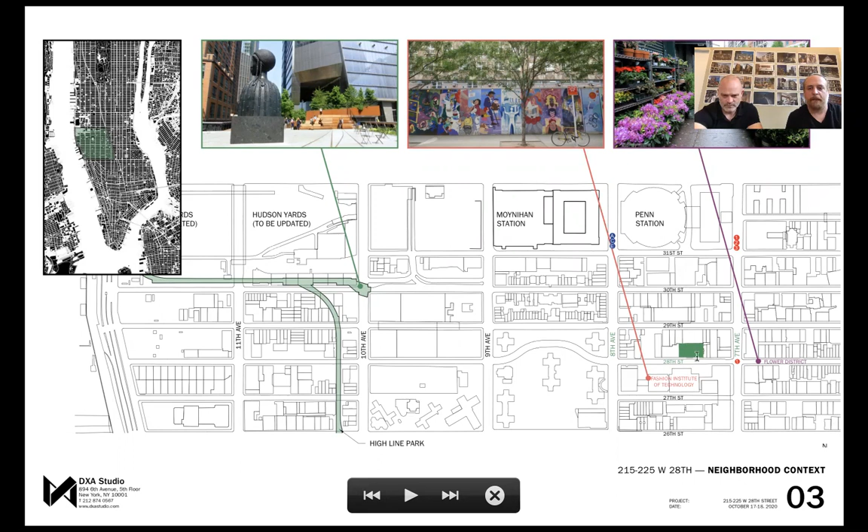So just to help orient you to the site of the project, our project is located right here on 28th Street between 7th and 8th Avenue. It's a really interesting block that's undergoing a lot of different types of transformation. And it's in an area of the city with a lot of different things going on. There's Penn Station to the north, there's the Flower District to the east, FIT is located just south of the site. And then, of course, there's all the new development that's happening with Hudson Yards and the High Line over to the west. And it's just really interesting to see this neighborhood take on a complete transformation in the last few years.

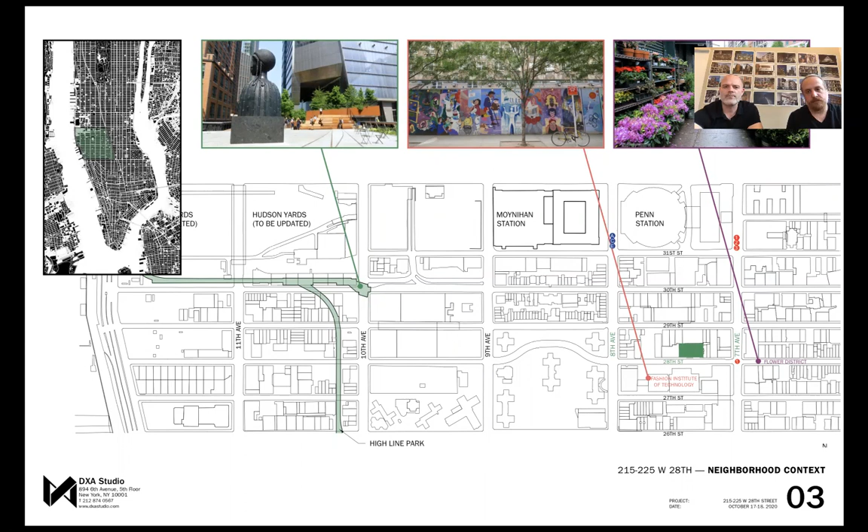Our block in particular is really going to be completely different in about the span of the next year or two. Our site is located in the sort of left center. And then there's all these three other new developments that are occurring on the block. And so this entire block is really changing in terms of its scale and texture for the city, and we'll walk you through how our particular project is being developed here.

So just to give you some of the basics, there's really two buildings on this development site, and that has to do with the zoning district. The zoning district is an M1-6D, and it's a very unique manufacturing zoning district in New York City that actually allows you to do residential construction. Most manufacturing districts do not allow that. So this is kind of a spot case where we can do residential.

And the project consists of a condo building, which is on the right-hand side of the image, which is the lighter building, and then a rental building on the left. And the total square footage of the project is around 300,000 square feet. There's 200 units of residential, and there's a portion of those residential units located in the rental tower on the left that are actually affordable units that allowed us to build a little bit taller and to do some additional floor area, which is a great benefit for the project.

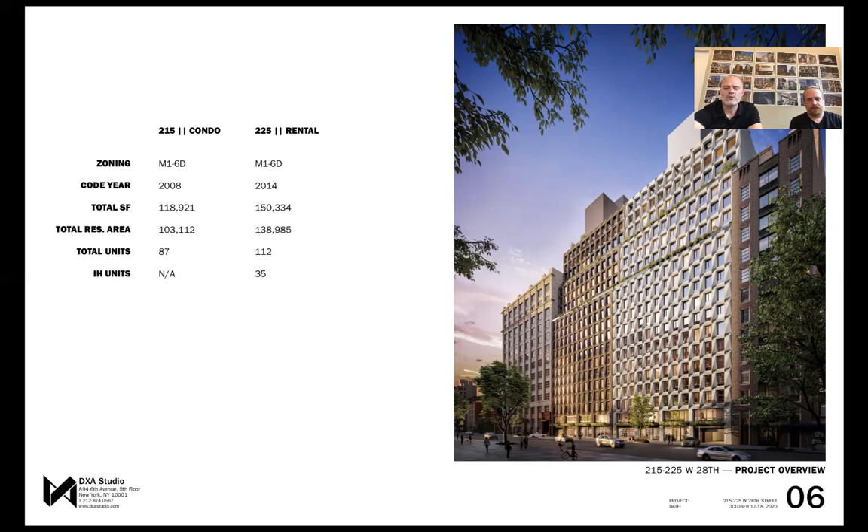And this became a lot of study in how this would affect the residential units, how it would affect kind of repetition as we move up through the building, and so forth. So this is where we started off in a number of different studies like this.

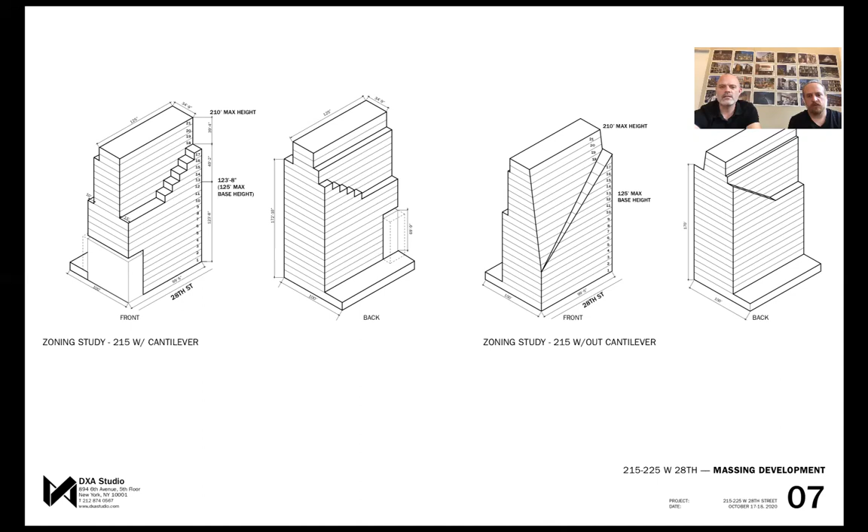And then one day, as we were discussing the complexities of building a deep foundation on the western side of the site, the owner said, don't worry about that. And then 2 days later, we had a meeting where they explained that they had purchased these sites to the west, and we essentially doubled the size of the project. So at that point, they decided that in addition to a condo building on the right, that we would also do the rental building. But there were a lot of dynamics at play, especially with those existing holdout buildings and how we would cantilever over or distribute the area between the condo building and the rental building in different configurations.

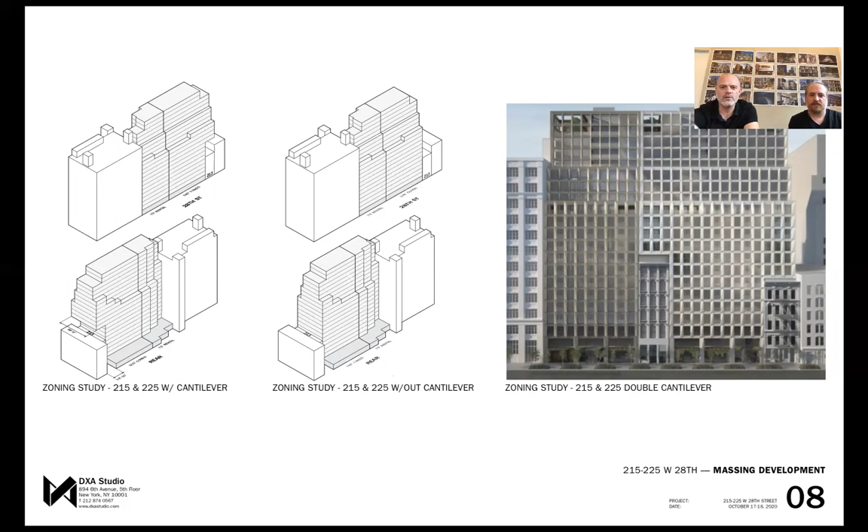And this became a series of studies that we did over several months to kind of maximize the project for the owner. And then ultimately what we did is we just kind of arrived back at a more simple solution, which was simply equally dividing the buildings, and also deals were worked out with those tenant holdouts. So we were able to do full-on buildings with complete facades on either side, which turned out to work really well.

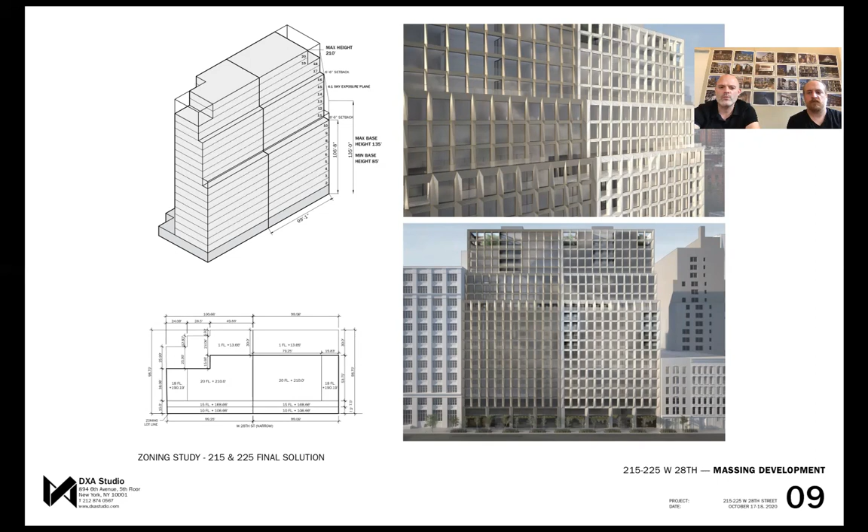And then with this kind of sky exposure plane, which is a zoning requirement that allows more light into the center of the street, we get a series of setbacks, so we really get kind of a tripartite division to the building: base, middle, and top. And Jordan will go into more detail about how the facade kind of reacted to that condition. And on the lower left, you can see just a basic floor plan of how the building is configured with the lots through, but the left-hand lot kind of indentation in the backyard, which affected the massing in the rear of the building.

So right off the bat with the facade, the project, as Wayne mentioned, grew from about 100 linear feet of frontage to 200, with a height just over 200. So we had kind of a large square facade surface that we were dealing with. And we were concerned about the scale of the building from the beginning in those proportions. The square is kind of inherently static. And we wanted to kind of balance things and make sure that the scale wasn't overwhelming.

Because like with most development projects in the city, we're charged with getting every bit of floor area ratio, the FAR, possible. So maximizing the form in a lot of ways is derivative of the zoning requirements that Wayne spoke of. So right off the bat, we were thinking about how do you scale this down? How do you kind of break up the rigidity of the building facade across that 200 linear feet? And so we thought about asymmetrical elements, as you see in the sketch on the left there.

But as we started to explore what building materials we were going to use and what construction technology, we really focused in on precast mega panel construction. That is essentially building about 24 to 25 feet of width, a full story at a time, with the windows embedded and constructed and waterproofed and ready to go, and delivered to the site that way so they could be hoisted up and put in place. And so using that technology really dictated a simpler and more repetitive geometry with kind of a donut construction, meaning kind of circular around the punched openings.

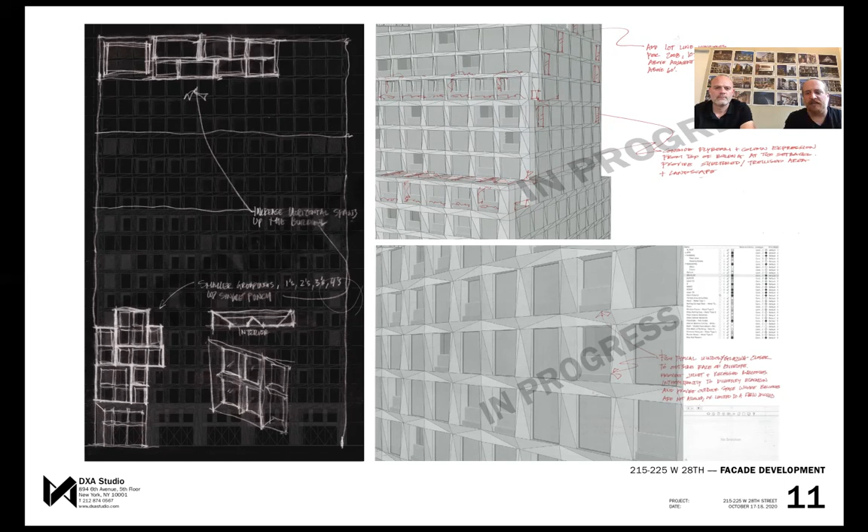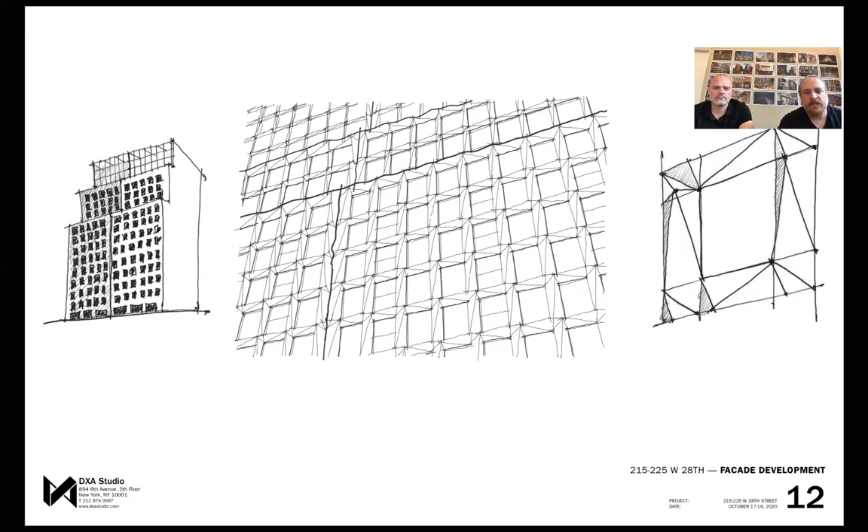And so then we began to focus on kind of a simpler geometry and looked to other design devices by which to kind of break down the scale to a certain degree. So we have the rigidity of this grid, but then there's a lot of depth to the faceting that we settled on. And then we also looked at contrast, essentially taking the condo and rental buildings and expressing them as two independent buildings and using contrasting colors or materials. And so quickly we settled on using the same material, but kind of a different nature, which we'll get into.

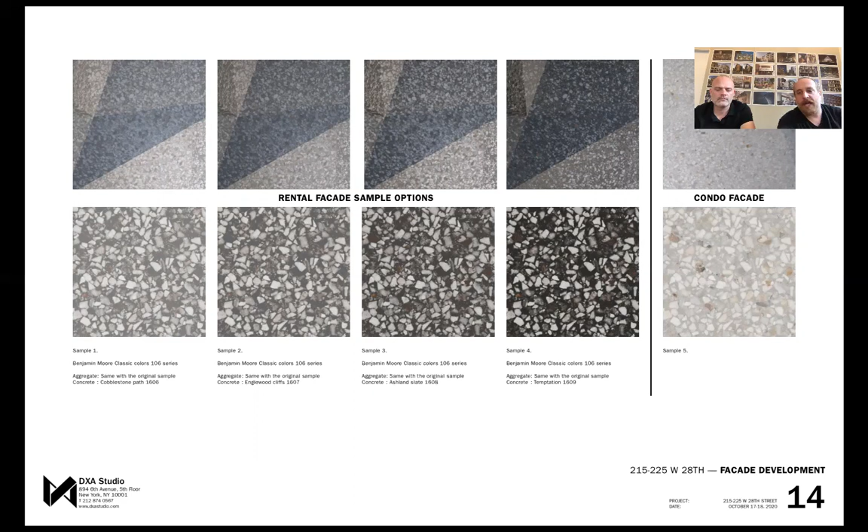So those colors and the contrast really come from the nature of the material, which we are treating like a terrazzo, casting this in concrete and then basically peeling away the cementitious outer coating to reveal the aggregate. And so this is where we landed with all of those tests and mock-ups of the different cast concrete system.

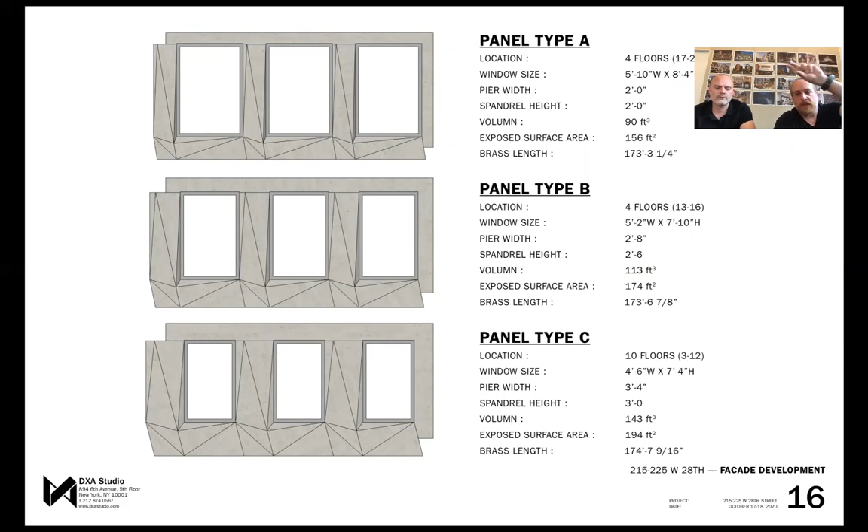And we worked with BPDL up in Canada, and we basically tried to dial it back and systematize the fewest number of panels necessary to get this kind of graded aperture of building as you work your way up the building. So these are the primary panel types, and then there's a few different ones for the cap of the building and the sides of the building.

So we systematized it, and we were able to, using the precast concrete, get a lot of depth. And that's not something you always are able to achieve in a facade. And why that was important to us is this site is extraordinary in that we're located right across from FIT, and FIT has, I think, about 6-story buildings. And we have an unobstructed view of the sky to the south for the top 15 stories of the building.

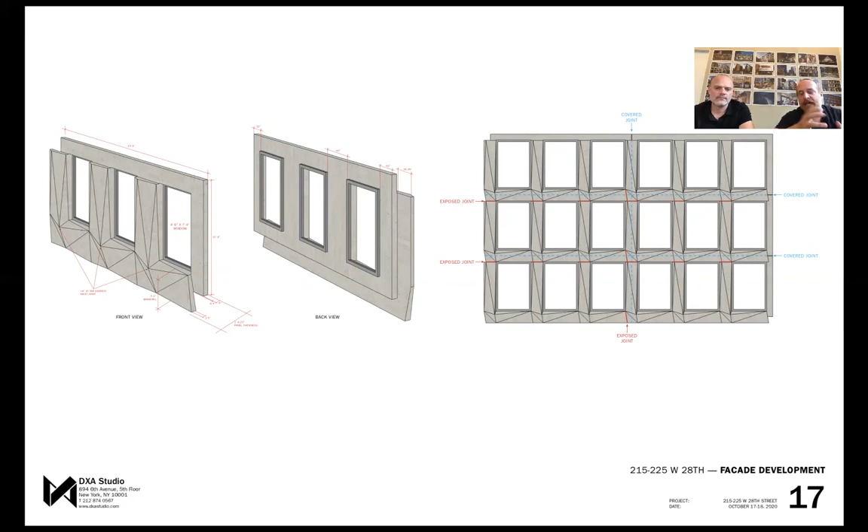So the relationship to kind of the sun passing by this facade over the course of the day was really important to us. And this faceted facade really brings the facade to life over the course of the day, changing dramatically from minute to minute as the sun illuminates portions of the panel and casts others into shadow. So we wanted to kind of accentuate that feature by

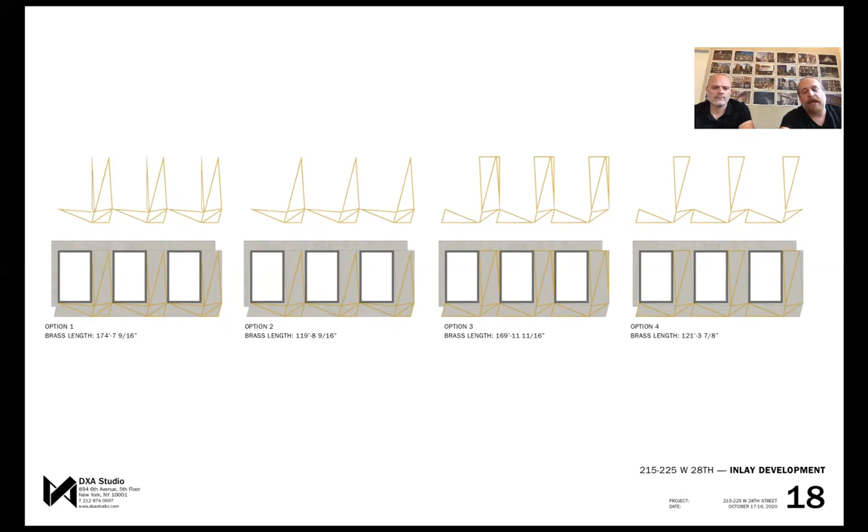We quickly abandoned this idea of an additive piece or a piece that's cast in concrete, and replaced it with this approach where we're able to actually cast a reveal where the facets meet one another, and then use automotive paint inside that channel. And that becomes a reflective surface, so that as the sun's moving across the facade and illuminating different facets, you're getting highlights in some of these channels. And so it's like another layer of kind of life and vitality to the facade. And we did that for the condo building.

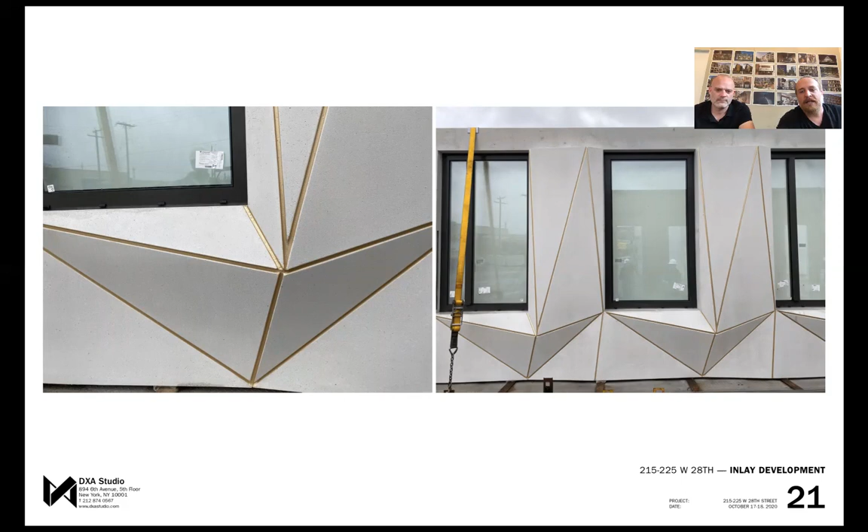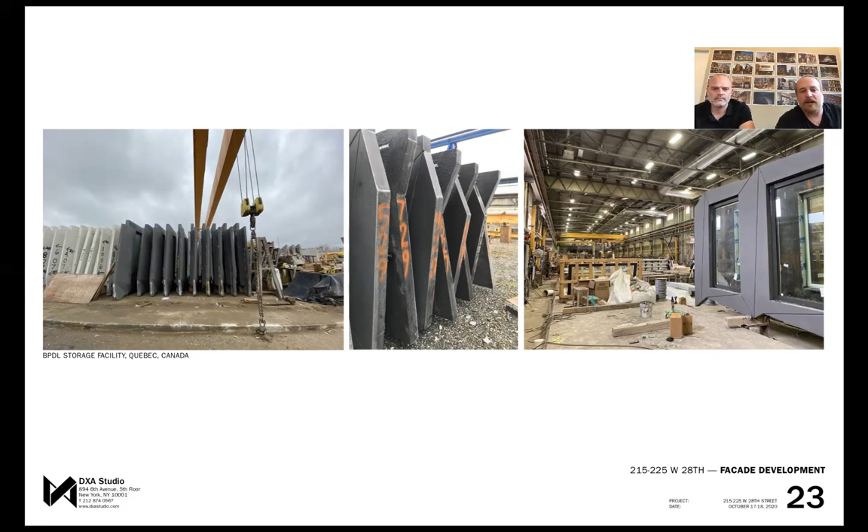And this is after a few days of them making the facade elements for both the condo and the rental building, and storing that inventory out in their yard. So here's some shots now going to the actual site where we're beginning to put these panels up. And the images that you're seeing here are actually from the rental side and some piers that exist in the lower portion of the building.

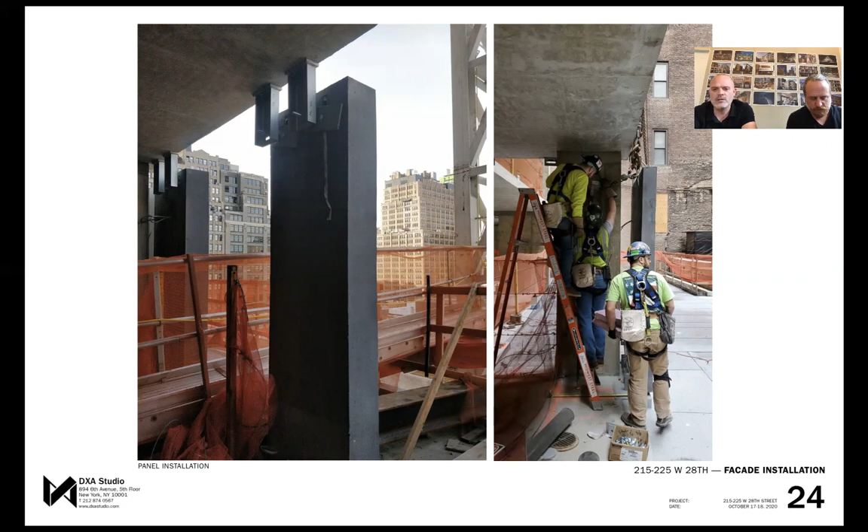So the way that these work is there's a tower crane on site. They're delivered in the trucks. They're picked up off the trucks, and then they're lifted into place, and they're attached to the facade with these kind of metal angle clips. And there's slotted connections, and there's also steel shims that are used to get the panels exactly in the right place. This is actually a shot from the 19th floor, as you can see the panel's labeled 1911 there.

And these panels range anywhere from, in this project, about 17,000 pounds up to 25,000 pounds, or even a little bit more than that. So it's a very heavy facade, and the structure has to be designed in a way that can accommodate it. But one of the real advantages, in addition to all the aesthetic things that we mentioned, is that the facade can be constructed rapidly.

In the span of just a few weeks, you can get the panels to be completely in place. And then from there, the insulation and the interior stud work and everything follows behind that in a very orderly sequence. And it's a really great process to this type of facade.

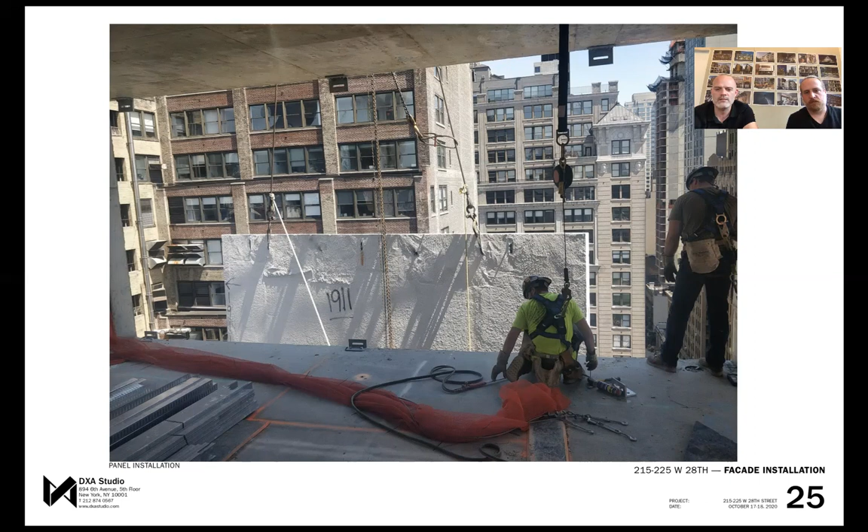This is a shot from the rental side on the 11th floor, hoisting another panel into place. And we like this shot because it actually was something we didn't try to do with the facade. We didn't really start by looking at FIT and their geometric pattern that they had. But later on, we realized that, oh yeah, there's a relationship there that's almost an inherent thing, ours being a very different approach. But it was an interesting connection that ended up happening. That happens on projects a lot of the time, that there's an unintended direction that evolves, whether it's subconsciously or just a total coincidence. We see it happen on many projects, and this is definitely one of them.

So then here's a shot from up on the 19th floor. So the 19th and 20th floor, we have these fly beams. So it's actually an exterior space that is protected by the precast facade, and this works out really well because at that height there's a lot of wind and the elements are a little bit more intense, and also just that feeling of being exposed at that height is nerve-wracking for a residential experience. So we wanted to provide a sense of safety and protection up there, but it creates some really interesting spaces in the project, these double height views, and also the views out to the city skyline.

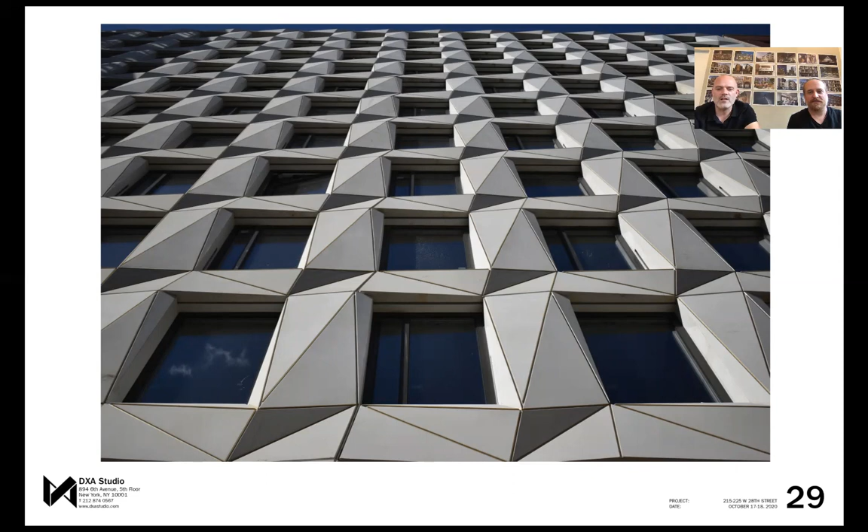So then ultimately, these are shots of the facade completed, and all of those effects that Jordan was mentioning about the shadow and the articulation of the inlay line work really comes together well. And we're just very excited about the overall quality of the precast facade and this contribution to the streetscape. Here's also a view of the rental building. In this case, we don't have the inlay, so it almost has this wave-like quality, which is really quite beautiful.

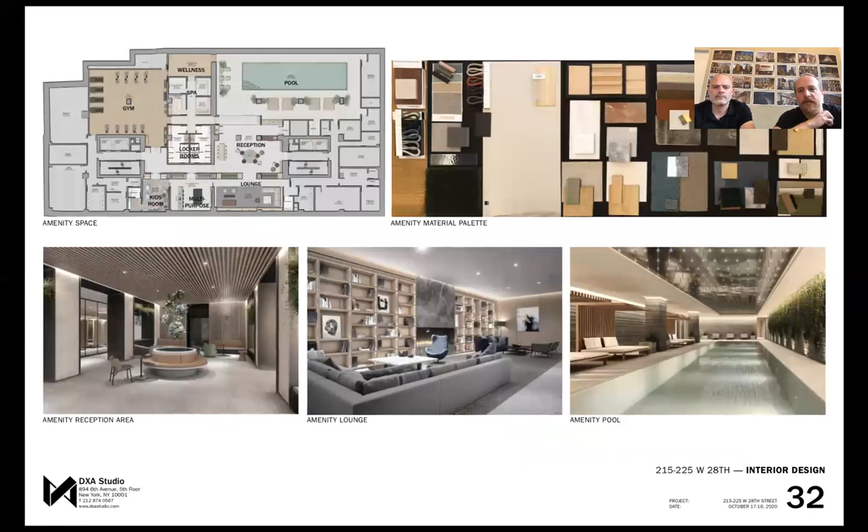So the interiors, like many of our projects, we wanted there to be a very strong relationship between the envelope and what happens on the interior. So there's a coherence to the overall design vision. And so in this case, we focused on health and well-being and thinking about this building as a respite from the crazy city life that we all live in New York City. And with that comes a really incredible amount of amenity space. I think we have over 30,000 square feet of amenity space available to both the condo and rental buildings.

And a big portion of that is subterranean. We'll get into this really amazing parking system that we have for all the residents in a minute, but beneath all of that is this incredible amenity floor. And initially we tried to really bring these shoots of light down to activate the space, but that proved to be infeasible. And so we focused on really natural materials, stone and woods, which also gets repeated up in the units.

But we also spent a lot of time thinking about the quality of lighting. So there's a lot of indirect light and materials selected for their luminous qualities. So we wanted it to be a bright, energized space, and it's really again focused on health and well-being with a big spa, a swimming pool, a gym, and then a community lounge area and multi-purpose room and kids' playrooms. It's got a little bit of everything. I think there's even a pet spa in there, which is not uncommon in buildings in the city these days.

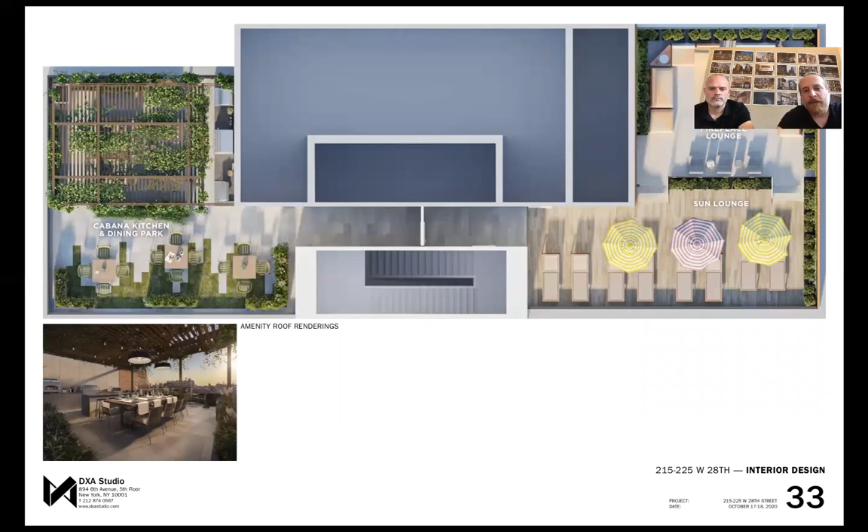And then the northeastern corner has a really incredible view of the Empire State Building, just a few blocks away. So that's kind of a lounge area with a big fire pit. So this is going to be a fantastic amenity for the people living in the building.

And then the material selections and palette, we played a little bit on the contrast of the hue and materiality on the facades, and brought that into the master bath. And then the strong geometry is also brought in the form of chevron patterns, or this custom carpet that we have that's actually the same geometry that you find on the panels, and that's through all the public corridors.

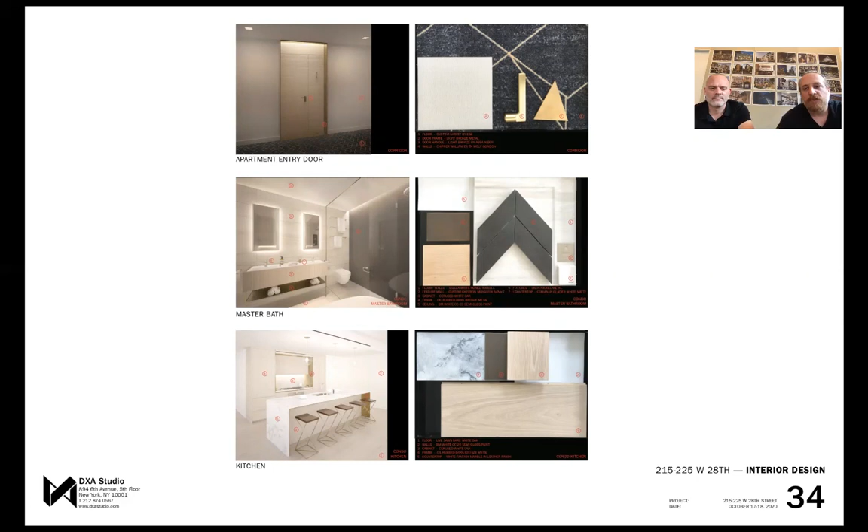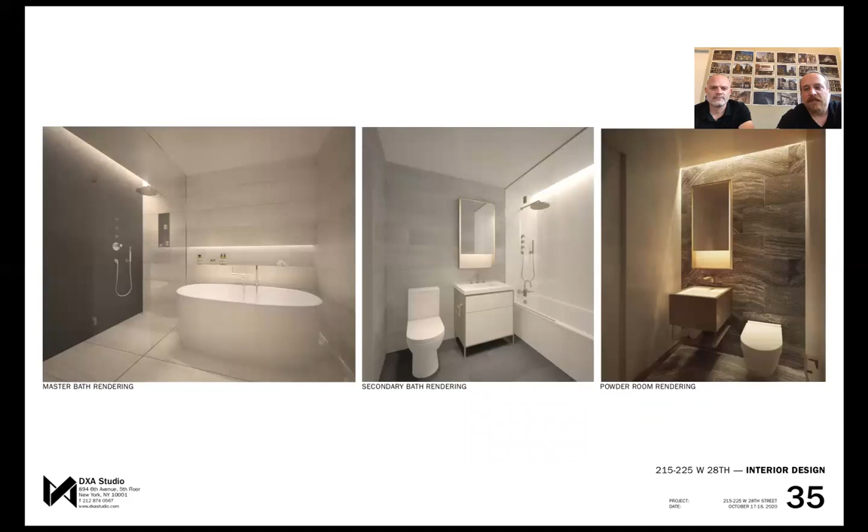And then a majority of the living spaces, the kitchen, living room, dining, is almost kind of a Scandinavian palette, white oak, and then white fantasy leather finish marble. So it's got really nice texture to it as well. So here's some shots inside the bathrooms with the contrasting materials, and the master bath, as I mentioned. And we love the powder room with this undulating gray marble.

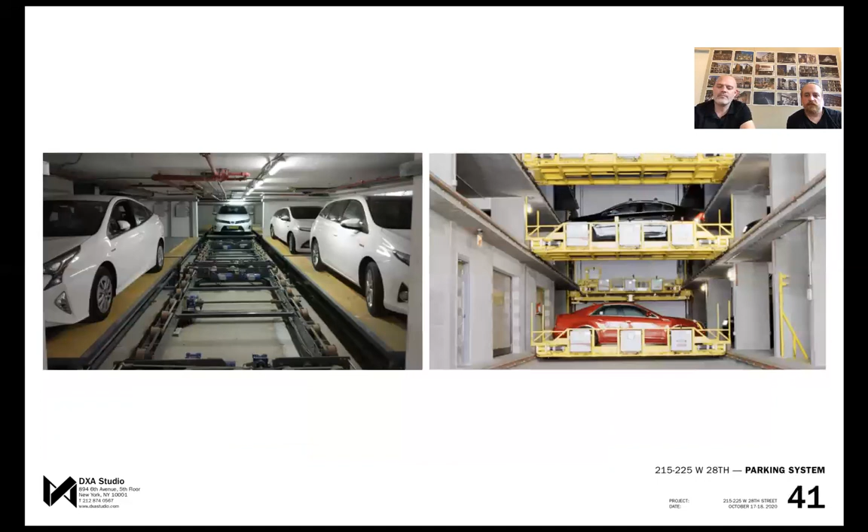All right, so one of the really interesting aspects of this project is actually the parking system. This building doesn't require parking, but the owner was very interested in including it and trying to push the limits on how much parking could be provided here. So one of the things that we recognized immediately was parking would be very difficult in terms of being able to get a ramp into the site, and the site is split into two buildings.

So we needed to have separate ramps in and out, and all of a sudden we were wasting a third of the floor plate with just getting circulation down into the parking system, and that space was way too valuable for retail and so forth. So what we did was we looked into an automated parking system. And so there's different types of automated parking.

On the left-hand side, there's a sort of older version of automated parking where you have a central space. The cars are brought into that space on these mechanized conveyor belts. And then the car gets moved into a spot, and then the belt goes back and picks up another car and so forth. So the problem with this is that while it's a lot more efficient than a traditional parking garage, you're still losing all of that space in the center to circulation.

So what we looked into was what's called a puzzle system. It's been developed in Europe and in Israel, where you literally have cars on pallets, and they can move around almost as if they're literally like a puzzle. And you leave one space open, and that allows you to move all the other cars around and get your car in or out. And so it's quite incredible. It's completely controlled by computers.

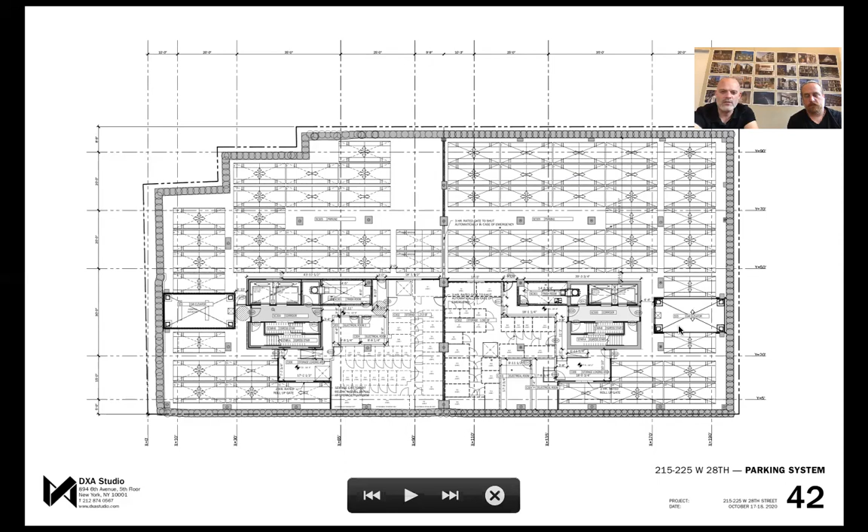This is the lowest level of the development. And what you can see here on the upper portion of the page and a couple spots on the lower portion are all of these different spaces, and they get labeled with different types of arrows indicating the directions that those pallets can move. Hopefully you can see my cursor here, but there's an elevator on the right, an elevator on the left. And so the cars come down, they're in the correct orientation, and they simply move around. That's the lowest level. Then we have another level of parking as well.

And actually during this process, the fire department and the Department of Buildings became much more aware of these systems and began to pay a lot of attention to how they could be improved to make sure that the conditions were safe for firefighters to come fight fires in this type of configuration.

So originally you could build an empty shell and have a steel cage that the cars could move around within, but the fire department ultimately figured out that it would be best to have separate floor slabs, but you can do a much tighter floor to floor, maybe 8 or 9 foot floor to floor, and you can have the cars within that moving around, and then there's access aisles that need to be provided. So in the end, it was a very long approval process, but we worked with the city to figure out the best ways to configure these systems and make them safe.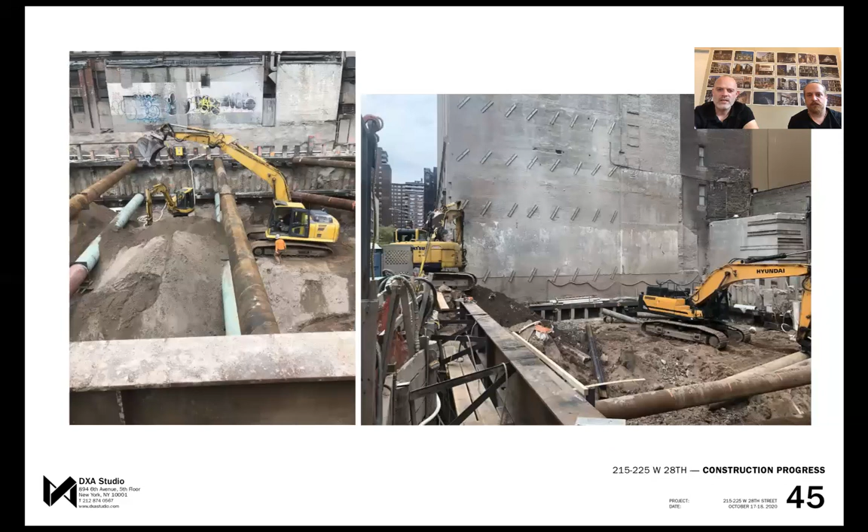But the foundation system is a secant wall, and it's a series of piles that you can see on the left-hand image on the back wall there. So these are concrete piers that have steel within them. They get drilled into the earth, and then it's excavated out behind them. The piles slightly overlap, so it creates a continuous wall the whole way around. And this type of system means that you don't have to underpin the neighboring foundations down to the depth that we were going, which would have been very cost prohibitive.

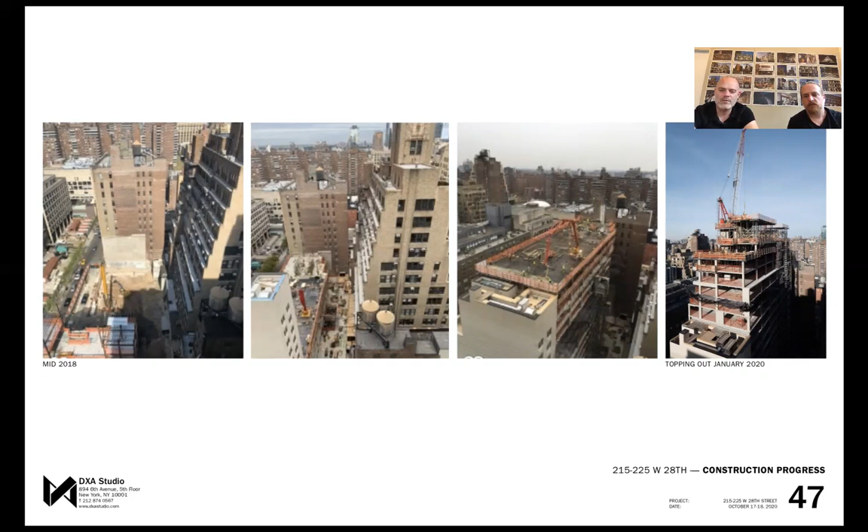And all these shots, we were very fortunate in this project that the sales office is located on adjacent property. So we're taking all these photos directly from the sales office. So when you come and look at an apartment, you can actually get the view that you're going to get, and you can literally see the construction site. So it couldn't be much more perfect than that. And so here's some views up on that 19th floor that we talked about earlier.

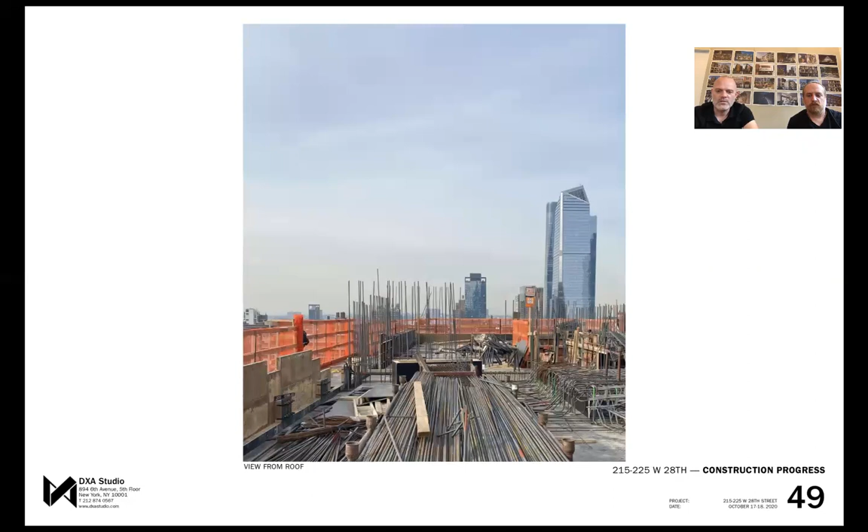You can actually get some spectacular views of downtown Manhattan, and you can see the Statue of Liberty sometimes through the buildings. So it's going to be really great, and getting all that sun from the south will be really wonderful in the apartments. And then a view out to the west, kind of the midpoint of Hudson Yards. This is even taller at this point, but really great sunset views, like Jordan was mentioning as well.

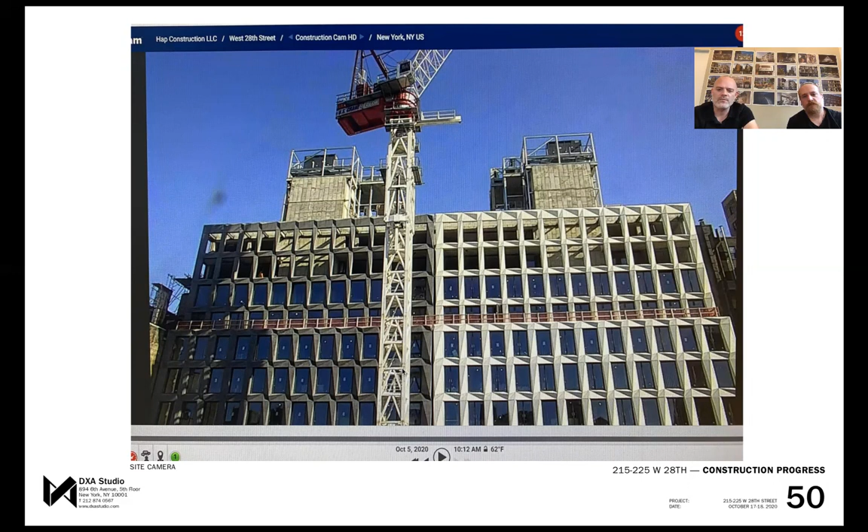And then we have a camera on top of the FIT building across the street, so we've been watching the construction go on. It's been really great to see the crane picking up the precast, putting it in place. Facade is now totally up, working on the bulkheads up on top of the building that house all the mechanical systems. And at this point, we're just a few months away from completion on the interiors as well. So just in closing, a couple more images of the facade.